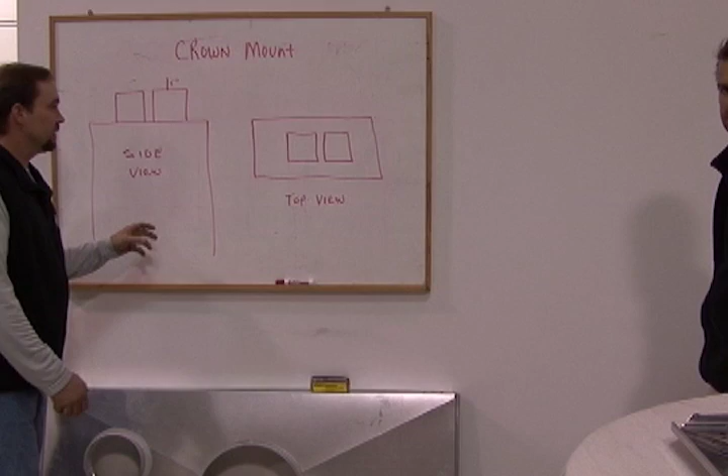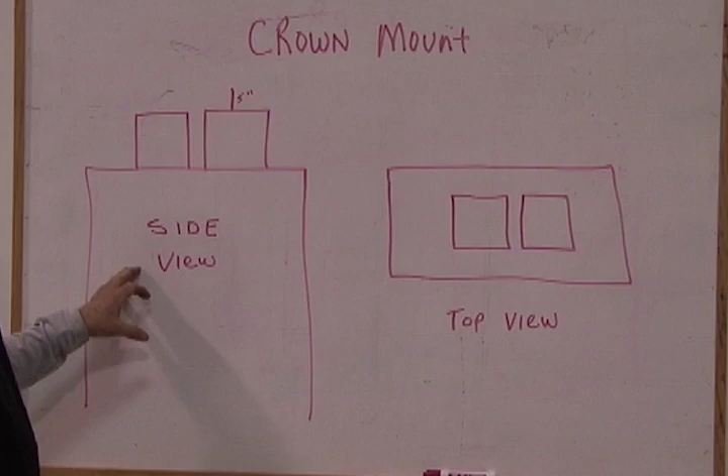Okay, we're going to take a look at our board over here. Here we have a typical double flue chimney. You can use this type of cap for a double flue, triple flue, all the way up to 6, 7 flues if you have that many. This we're looking at a side view. Here we have the terracotta clay tile sticking up out of the top of the chimney. Here we have a top view looking down at the top of the chimney. These are the terracotta clay flue tiles sticking out of the top of the chimney.

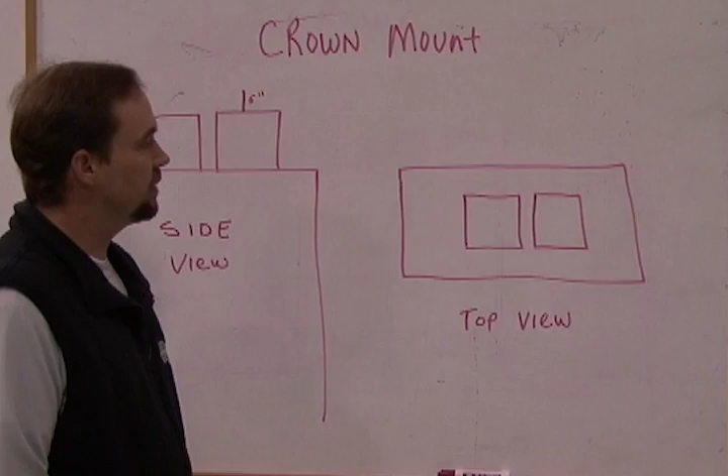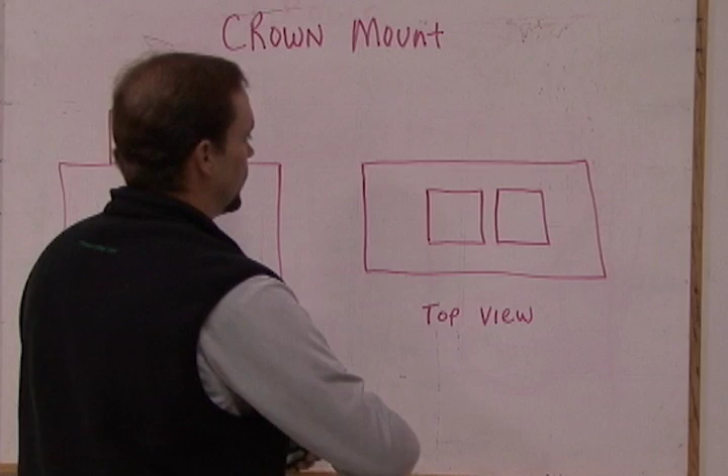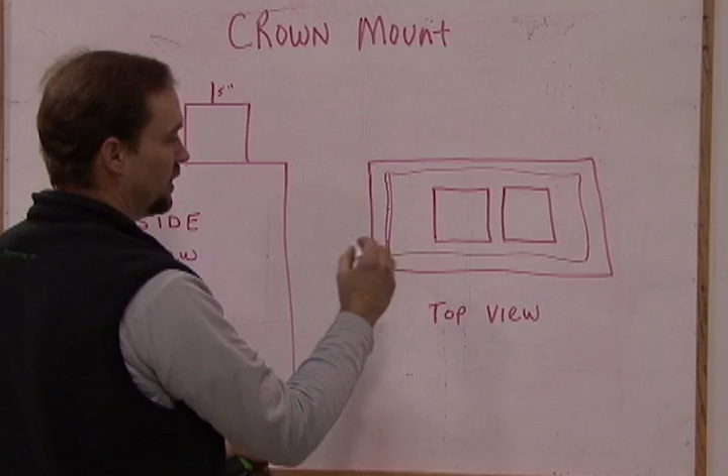To measure for a custom cap, you want to measure the width and the length, and you want to subtract 3 inches off of your width and 3 inches off of your length, so that the cap is actually going to be sitting on the crown right around in this area here. Okay? And this gets actually bolted. There's a flange on this that'll actually get bolted right to the crown. So this will be a very secure cap.

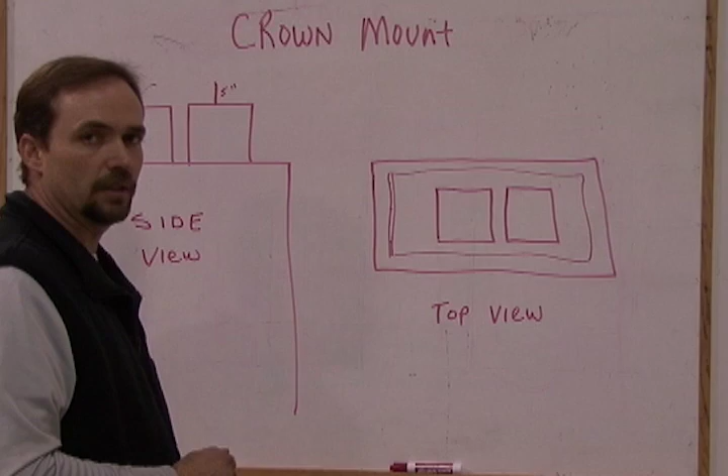The lid on the cap is actually removable so that the flue can be cleaned from the top, and then the lid can be bolted back onto the frame. The frame is permanent and it stays mounted to the crown of the chimney. So basically you just want to measure your width, your length, subtract 3 inches, and that'll put you perfectly where you need to be on the top of the chimney.

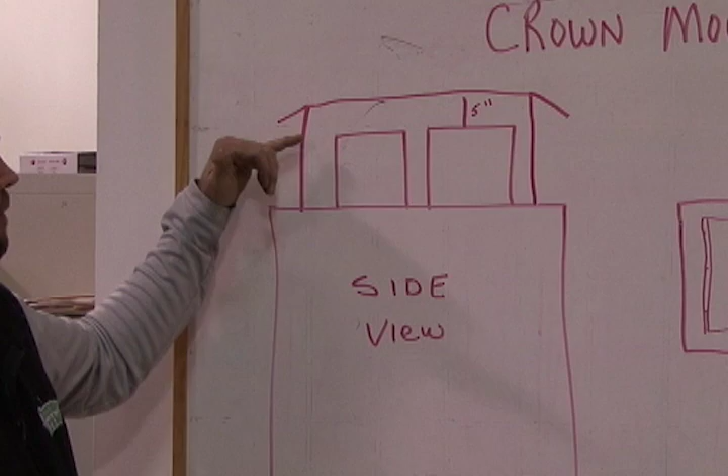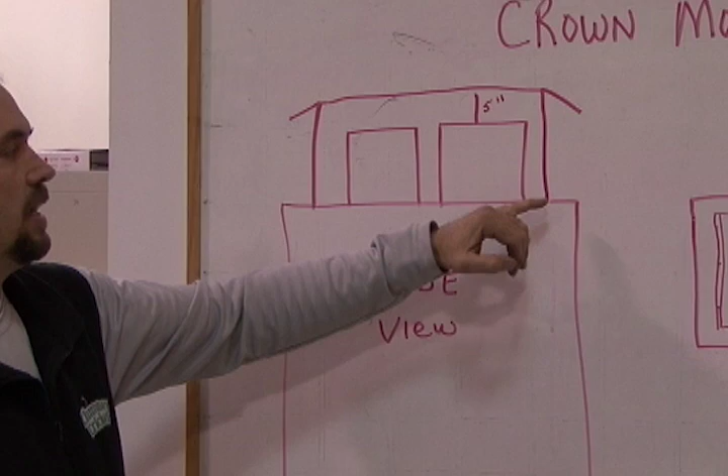Okay, the second thing you want to measure for is your flue height. We need a minimum clearance of 5 inches from the top of the flue to the underside of the hood. That allows for proper ventilation, that allows for a proper draw on the flues. Whether it's a fireplace or a furnace or hot water heater flue, you need to maintain that 5-inch height difference. And that's when you're talking your mesh height. This is your mesh height from the top of the chimney, the crown, to the top of the cap.

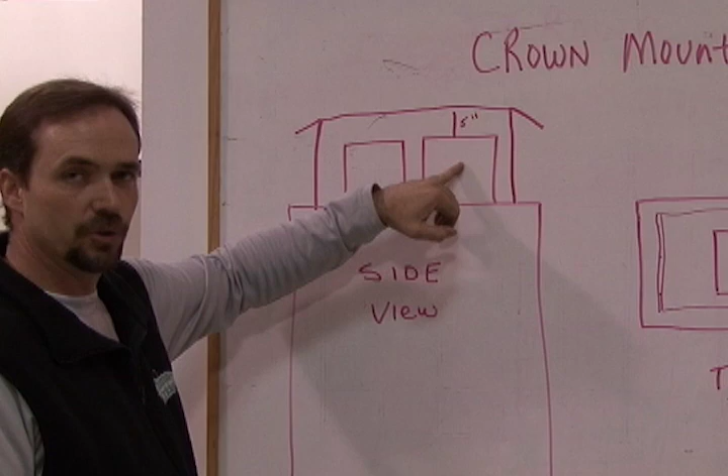So we want to make sure that we have 5-inch clearance from the top of our flue tile to the underside of our cap. So let's say, for example, that this is 5 inches sticking out of the top of the chimney. The flue height is 5 inches. We want to add another 5 inches to that for proper draw, proper draft, so we're going to have a 10-inch high mesh. You can get the mesh heights in 10, 12, and 14-inch heights.

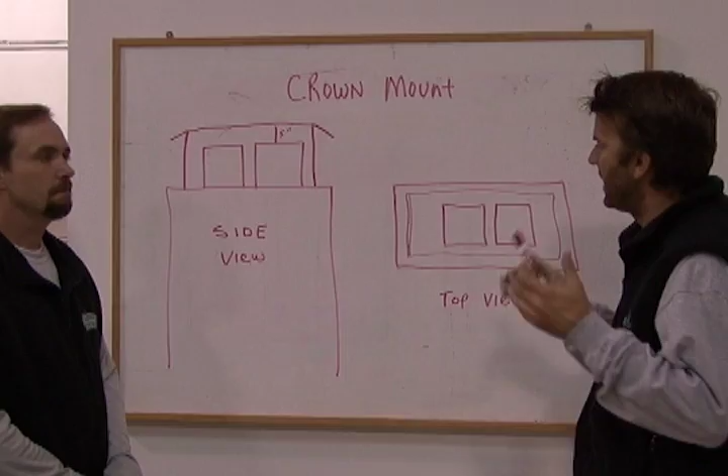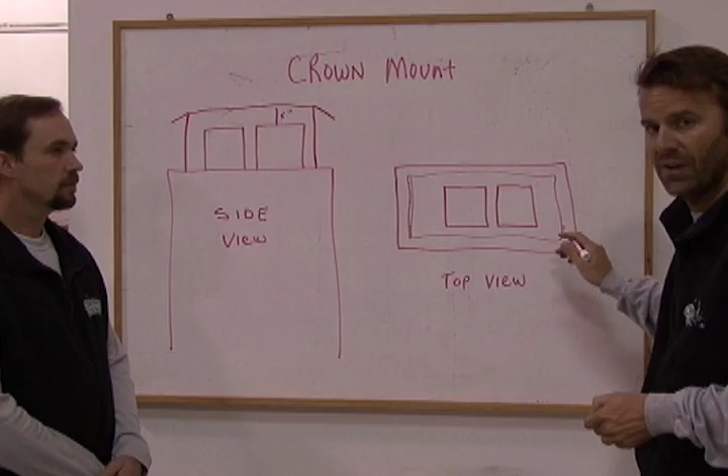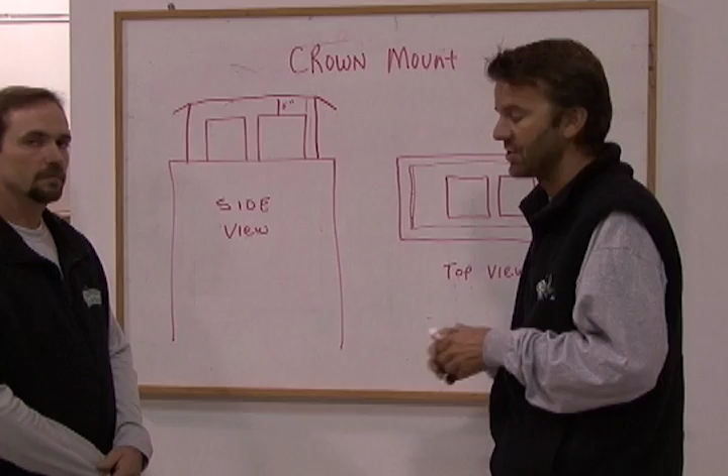So I have my mesh size, I have my chimney cap size, and this can cover how many flues? Multiple. You can cover 10 flues. We can get them custom made to cover a chimney that has 10 flues in it.

Wow, that's awesome. So ultimately, what I like to do when I install these caps, folks, before I put this cap on, once I have all my measurements and the cap sitting into my box, I'll apply a nice little crown coat to the top of that chimney.

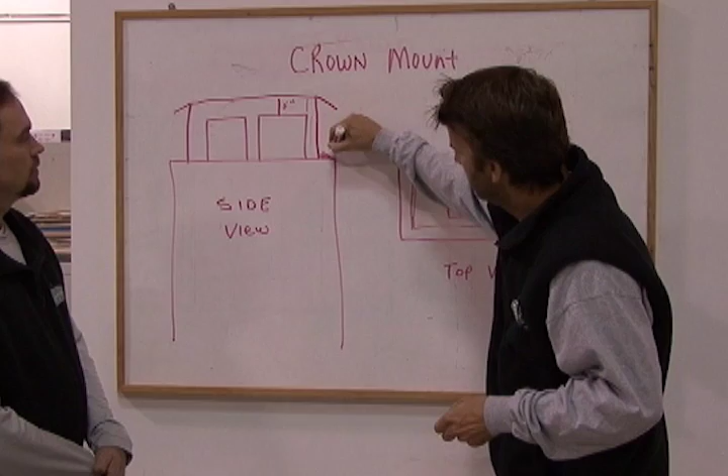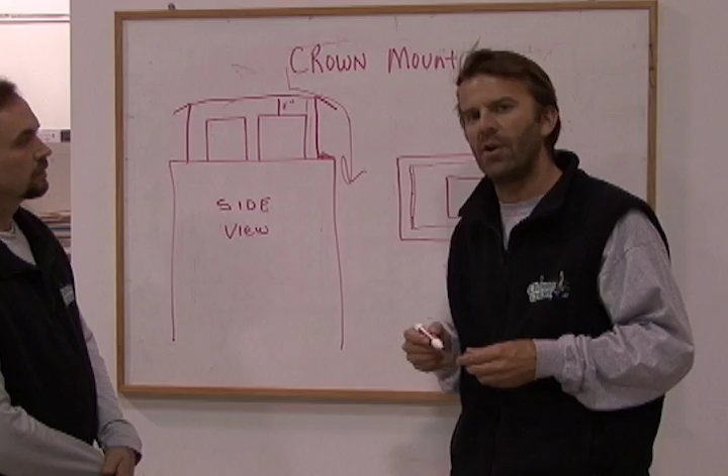What's that going to do? It's going to allow extra protection for that chimney. It's not going to allow any water to get inside, and between this and the ridge, rain hits here and washes off the chimney — you're eliminating any water entry. I highly suggest a multiple flue chimney cap on any chimney with multiple flues, just because of the protection.

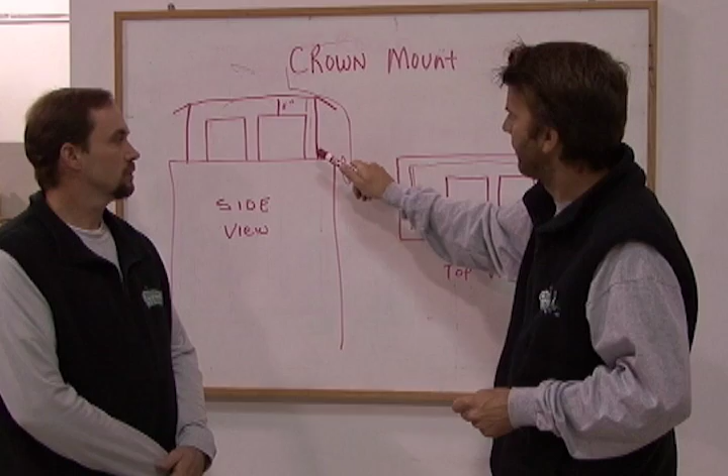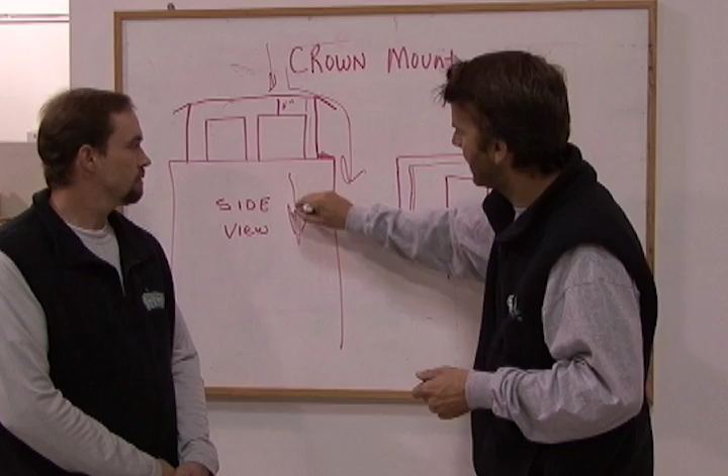Nothing's getting inside this chimney anymore. Water getting inside the chimney is how chimneys erode — we rebuild them every day. It's water getting inside an unprotected chimney that causes the top to crack, letting water in and starting to erode the brick. So, that being said, you have these flue tiles.

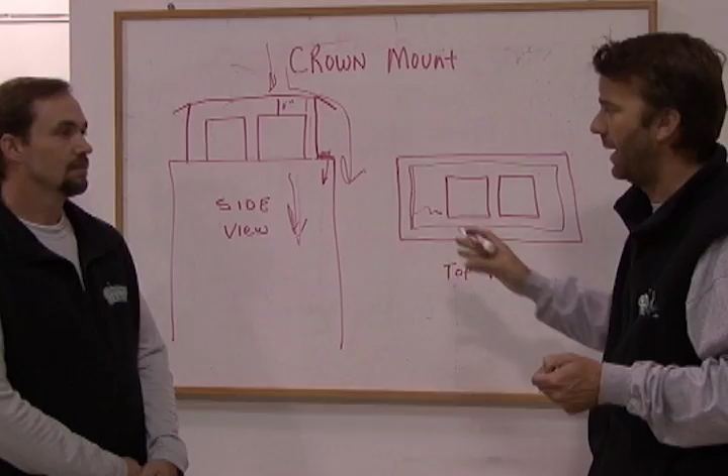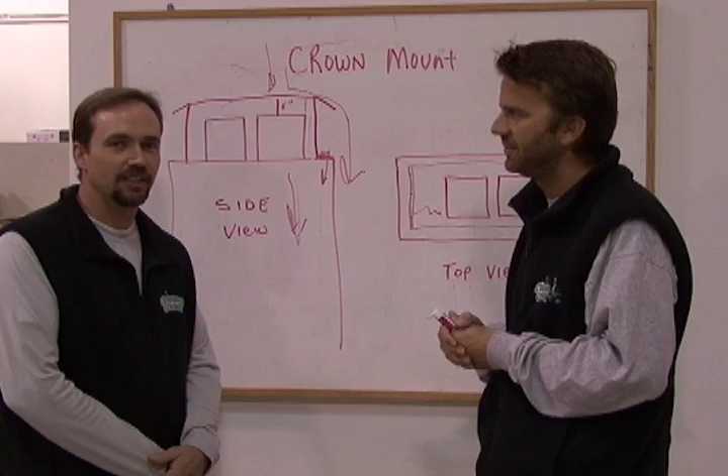What's another great reason for a multiple flue tile chimney cap? Dean, what is it? Keeps the critters out. That's excellent — birds, raccoons, and squirrels love to nest inside your chimney. It's a natural home for them, they love it. This custom cap will keep critters out of all of your flues.

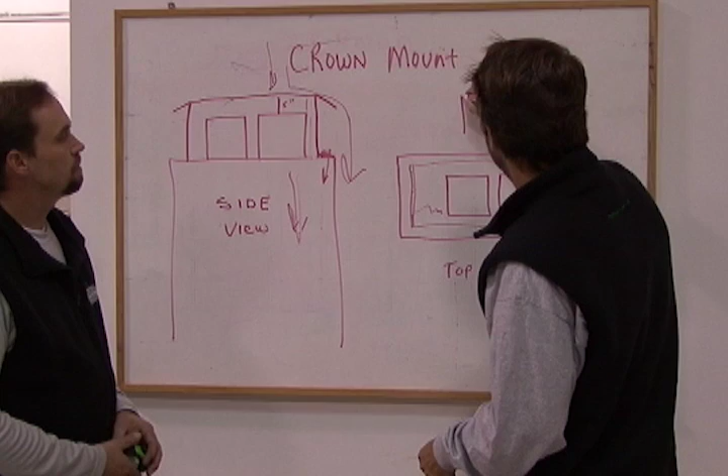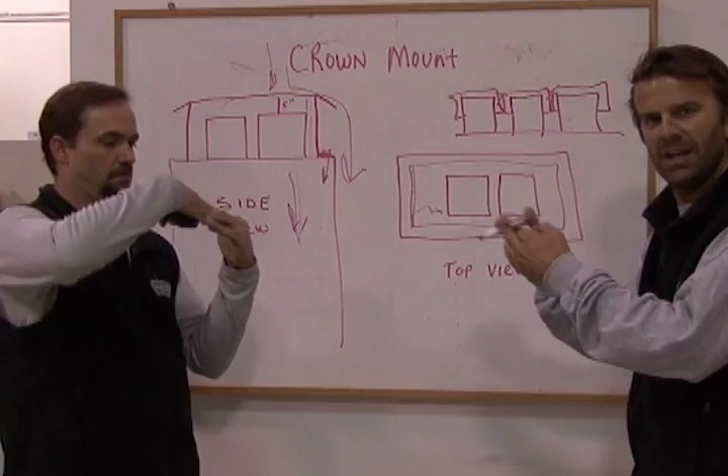That's excellent. Another problem we run into, maybe not every day, is unsightly homes with the same chimney having multiple flues but single flue caps instead. With single flue caps, the space between the caps and the hoods gets bent all over — it's a mess. This is much cleaner, much more beautiful.

They come in stainless, black, and copper. I suggest these on any multiple flue chimney. You want an ounce of prevention instead of a pound of cure in this situation — the other setup is unsightly, it's just not meant to be. Some things, folks, are not meant to be.

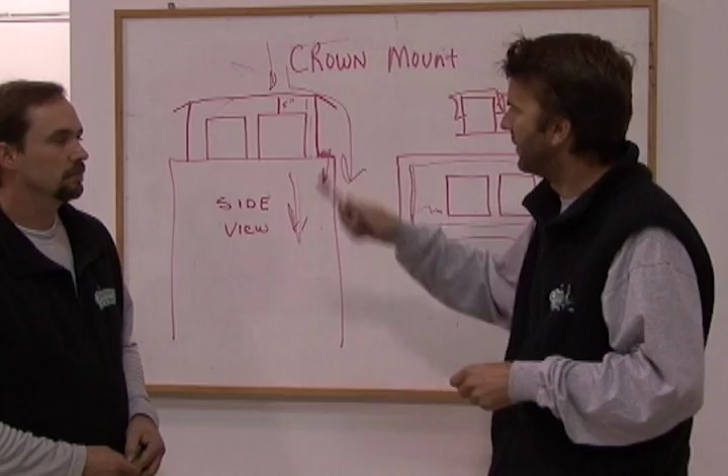But a chimney cap with multiple flues, or a multiple flue chimney cap, is meant to be. And we're meant to sell it to you. Absolutely.